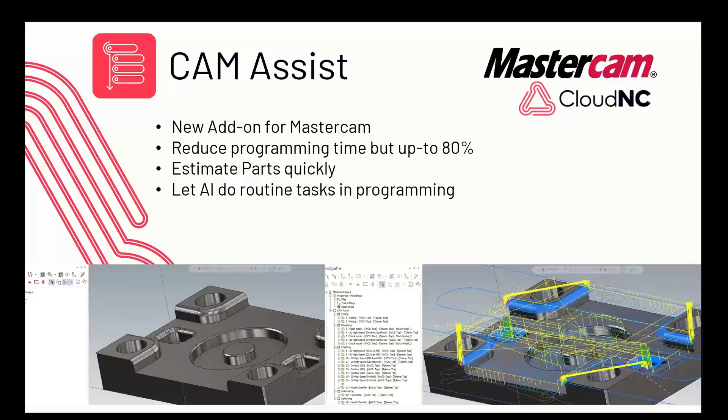So Ryan, on that, 4 to 8 weeks is what they're out for ITAR compliance. That will be a whole separate server that they're using that will be registered and be good for ITAR compatibility. So 4 to 8 weeks. And I do have a list of people to be contacting once that comes available.

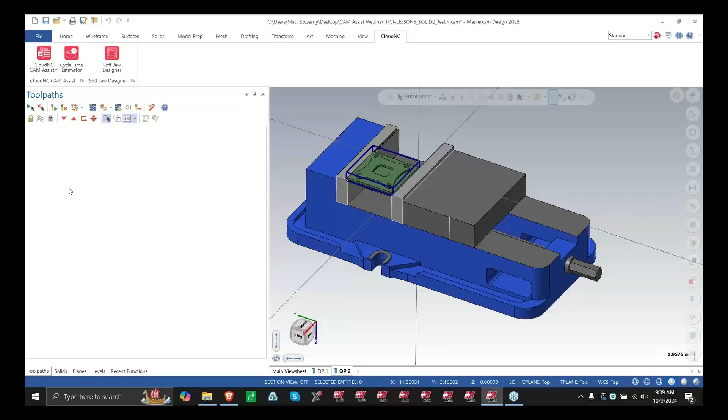Next, I need different machine group setups. So if I'm doing one operation, I need to define that. If I'm doing 2, which I'm doing here, I'm going to need 2 machine groups. So I'm going to quickly do that here. I'm just going to go to my default, and I'm going to need 2 of these. So right off the bat, I'll just call this one op1, and I'll call this one op2.

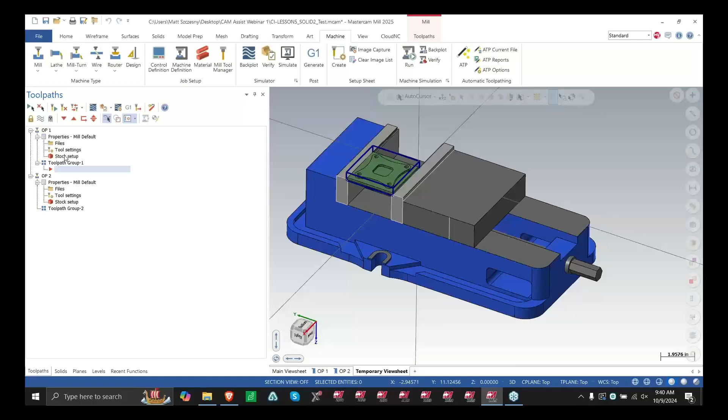So inside these machine group setups, you have to only define 2 things, and that is your stock and your master model. So I'm just going to go right to that page here, and I'm going to turn off my vise here just so it's not in my way when I define the stock, because I've created that nice bounding box for me. So I'm just going to go through this here and define that as my stock.

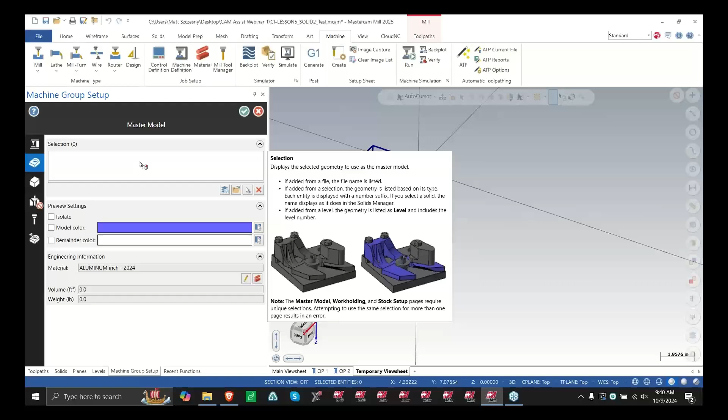Okay. Now this is the master model. This is another thing Cam Assist needs to recognize. All this section is determining what is your finished part and what's not. So I didn't want to define that whole fixture assembly, that Kurt vise in there. So all I'm going to do is say, hey, this is my part right here, and I'll end the selection on that. So that's my first setup right there.

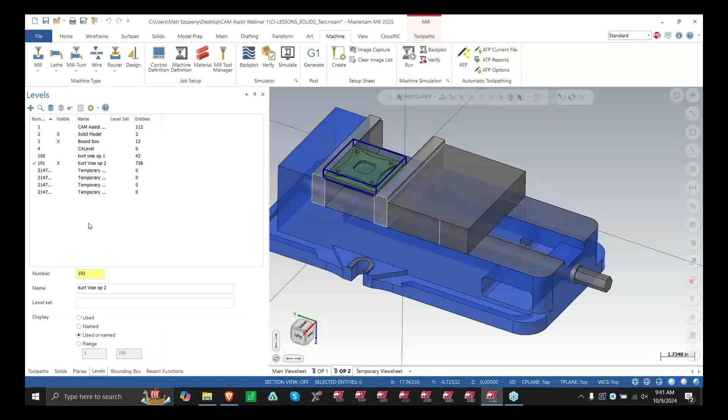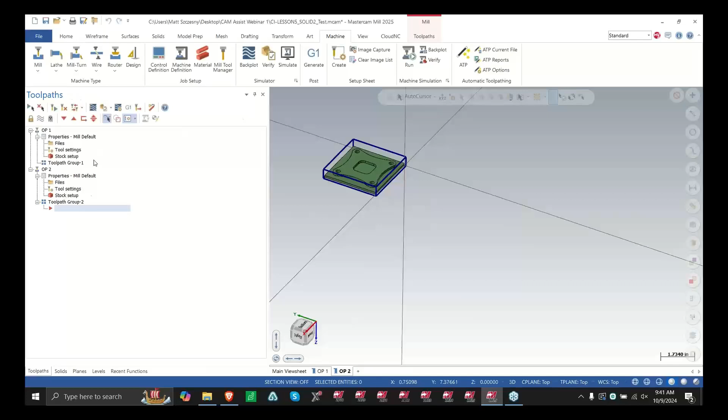Now the second one down here, you need to define it the exact same way. So I'm going to go to my op2. I'm going to turn off my vise here. So again, they have to be the same values in operation 1 as they are in operation 2. Again, I'm going to set up my master model. And then I can just green check out, and that is quite literally all you have to do for the machine group. Just set up your stock, set up your master model. So that's step 2 there.

Now the next thing, we want to determine our tools. Now I'm going to show you a bunch of different ways that you can let Cam Assist use its own tools, or you can, in this model, I'm actually going to define what tools I want to use. So I'm going to open up a library here on my desktop that I'm using for this. So I'm taking these tools here, and I just came up with some random ones that I thought would be a good job for this part.

Now those of you that have seen this part before in the class we teach here at Elgin know that this part probably takes us more than half the class just because there's a lot of chaining involved, there's a lot of different tools, there's a lot of different things to cover, we're designing it. So I'm just picking a few tools here that I think would be good for this job.

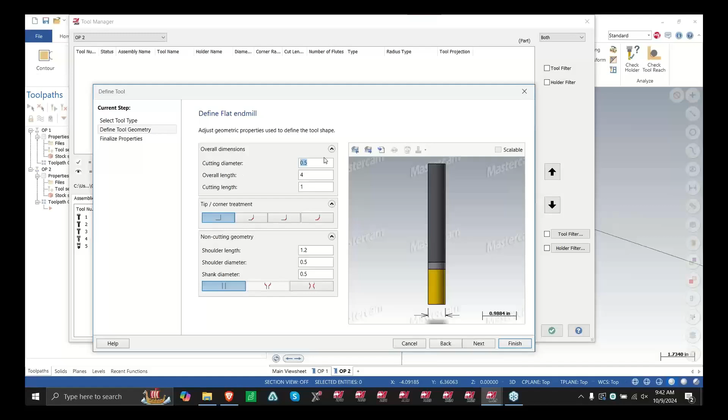Now, another thing I need to mention here is they have to be defined as assemblies. They cannot be defined as tools. Cam Assist does not pick that up. So if you've never worked with assemblies, it's as simple as I can come up here and create a tool. I can say like a 1/4 inch flat. And I could just bring it right down into that assembly, and now it's saved in that section.

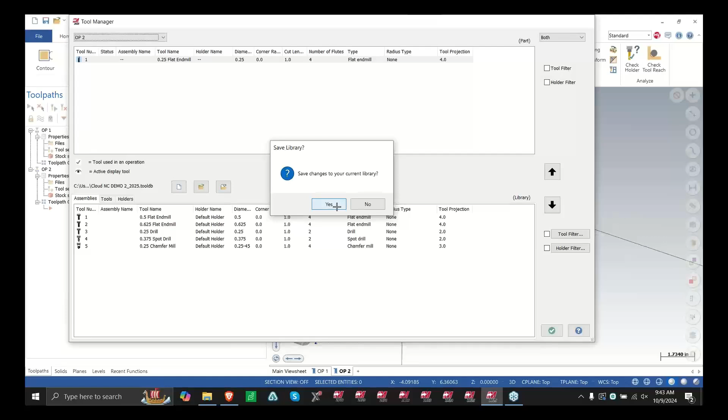I'm going to delete this just because I don't want to use that for now, but I just wanted to show you it's as simple as that. Creating a tool, bringing it down, it's now in your assemblies. So I'm going to green check out of here and save these changes. Okay, so step 1, we line up our part. Step 2, we define our machine group setups with our master models. Then we took the time to define our tool assemblies, all the tools we wanted involved in that.

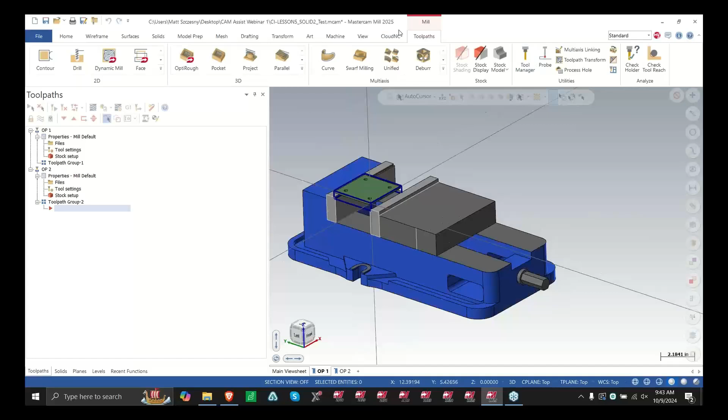Now it's time for us to jump right into CAM Assist here. So right here, I'm just going to jump into the CloudNC CAM Assist. Alright, so first thing we'll see here is the tool library. Now this is going to the, actually the correct library I want. I'm just going to make sure I have that exact one. Okay, so tool library is set.

We have different machining modes. I have 3-axis and 3+2. CAM Assist supports most CNC milling machines. It currently does not support any lathe, but that's currently in the works. So kind of stay tuned for that down the road. And I'll show you some 3+2 examples a little later in this webinar.

Next, you have the setup orientation. So I have operation 1, which I was using my top plane for. And then I have some select avoidance geometries. So I can go in and choose that. And I'm just going to pick these jaws right here. Say, hey, just don't come close to that. And if you hover over this section, it says press escape when you're finished. So now I have these 2 avoidances selected.

Op 2 here, default set to bottom, but I'm going to use the user-defined plane I created, which was just called op 2. And just to reference, that is this operation 2 right here.

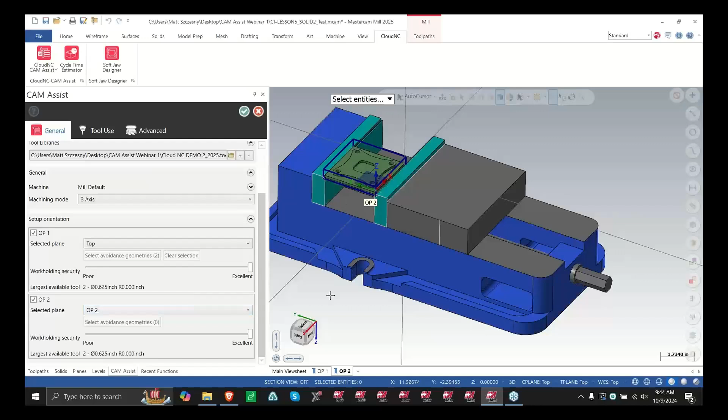Now I can jump over to my other view sheet and just say, hey, even though it's the same spot, I'm just going to click these jaws right here, and I'll hit escape. So I've defined my operation 1, I've defined my operation 2, selected any avoidances I may want. Now I can jump over to the next tab, tool use. So again, it's taking that exact library.

It found 5 assemblies, and this is that area where I said you can't just use tools, you have to use assemblies. I'll come back to why it says no material there a little bit later. But these are the stock materials that you can define. So there's aluminum, high carbon, low carbon steel, titanium. And now with the newest update, I think it came out October 2nd or so, you can now define alloys. So I have these different ones if I chose different stock materials. So that's a really nice new feature added.

So I'm just going to say, let's use aluminum. And I'm also going to come back to this section, but for now we're just going to say use CAM Assist feeds and speeds, but if I define them, you can use them as well. So this section down here, this is where I could filter out or decide what I want to use or what I don't want to use.

So right now, for tool 1, maybe I don't want it to do any helical boring. I don't want it to do any roughing, so I could just uncheck those and it's not going to do that toolpath or operation for it. Whereas maybe this number 2 here, I want that to just do roughing. I don't want it to do any of these wall finishing, flat finishing, or helical boring. And then I'll keep the rest of these on with drilling, spot drilling, and chamfer milling. The next tab over, this is where you can define what types of toolpaths you want to do.

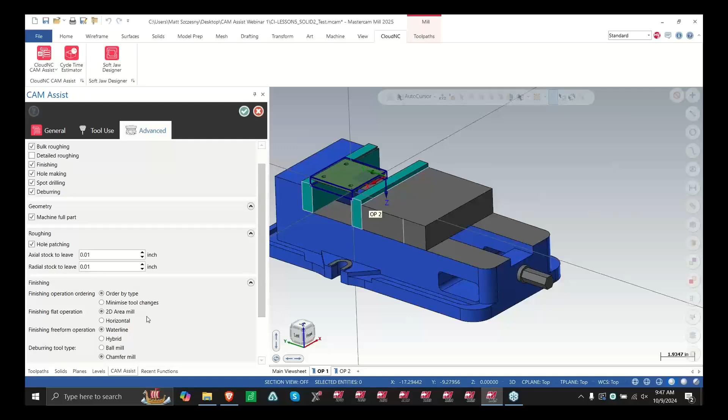The geometry section, I do want it to machine the full part, but if I didn't, I can just uncheck this box and select the faces that I want to machine. I'm going to leave some stock for axial and radial as is, and then you have what type of finishing toolpath is supported here. Now you're not going to see every finishing toolpath that you might want, like equal scallop. It's not quite in CAM Assist yet, but it is in the works. So these are the finishing ones that we're left with.

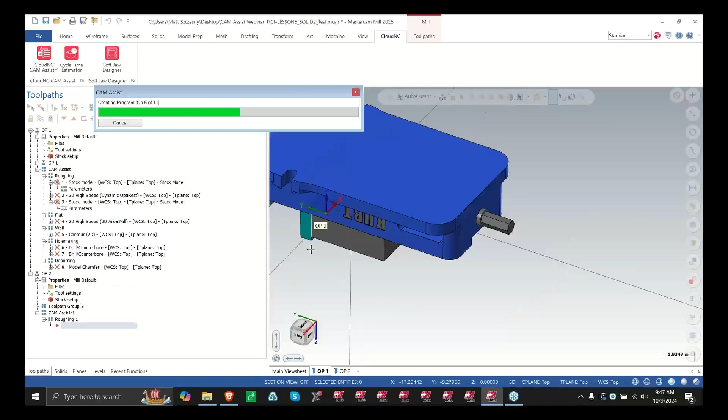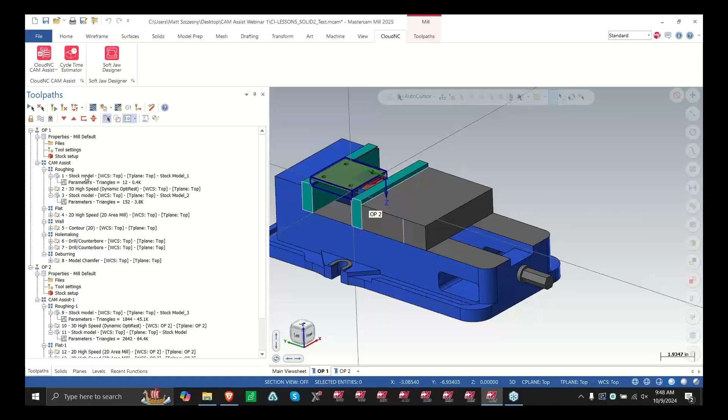Alright, so again, this is a lot faster regen time because it's a simpler part. The bigger models, the more 3D work involved, it's going to take a long time. And I don't want you guys to have to sit here for 30 minutes just watching this thing regenerate. So in the first operation here, we start off with the stock model that it creates. And then it goes right into its toolpaths. Starts avoiding those sections. Another stock model, followed by some other toolpaths to do the finishing, some drilling cycles, and some chamfering.

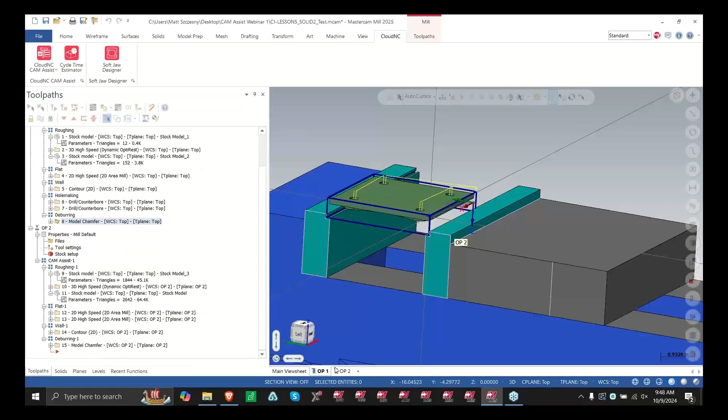Now operation 2 starts off with the stock model from operation 1, and then it continues on roughing using stock models, as we see there.

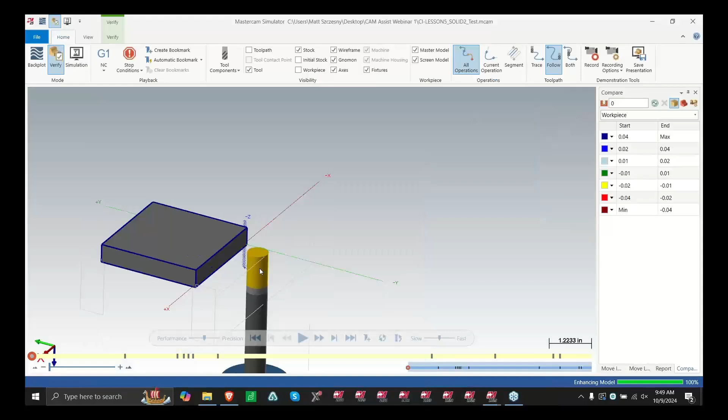So I'm going to select all of these. They go right into verify, and we can take a look at what it's machined. Slow this down a bit here. There's the bottom section, and then it's roughing out to the top. So we get those nice chamfers. It's finishing all those operations. So it did a lot more than half our part, absolutely.

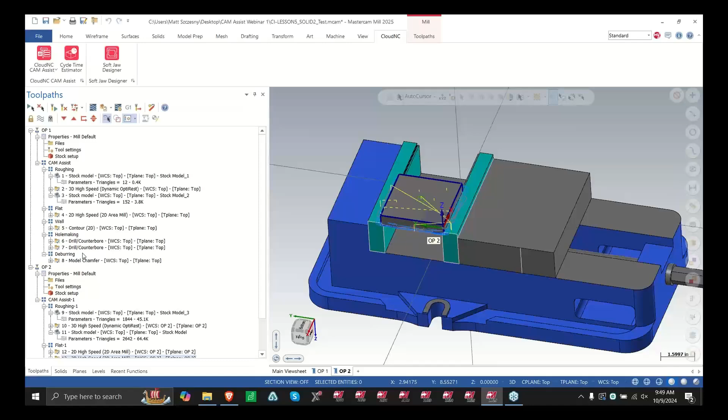If I come back into Mastercam here, there's a few things to note. Now, right off the bat, you saw it's taking all these toolpaths, programming the part for us. Now, if you are an experienced user and you know what's inside these parameters, you can, sure enough, go right into the parameters, and I can update any one of those pages with the information that's given. So it shows me what the speeds and feeds are used in Cam Assist, shows me all the different geometry selected, different cut parameters, linking. So I can go through this if I was familiar with that.

But let's say you were a brand new user, you had no experience using these toolpaths. How do I go about adjusting these without having to go through a bunch of training manuals and courses and learning all the ways of Mastercam? Well, any one of these toolpaths, like let's say operation 2 here, let's say for some reason I wanted to adjust this step over here for this OptiRest toolpath. Well, I can right-click on that tool, and we have the Cutting Parameters Explorer. This is basically to edit any Cam Assist toolpaths. So I can go right directly into there.

And we're going to get this nice interactive page that we can give all this information for. So it's telling me what operation I'm in. So it's the OptiRest toolpath there, determining the material. I'm using the default machine. Now, another important thing to note, you are going to have to take the time to set up your defined spindle RPM, your torque, get your machine specific in Cam Assist before running this. Shows the tool and the roughing that I'm using.

So this is a kind of nice interactive bar here. If I bring this over so I want to increase the tool life, these values down here will get adjusted. Likewise, if I bring it over to increase productivity, you can see these values are all going to shift. So you have depth of cut, width, spindle speed, feed rate, and if I go down a little, these are more specific to the machine itself. And again, these are all important information that Cam Assist is going to need right off the bat.

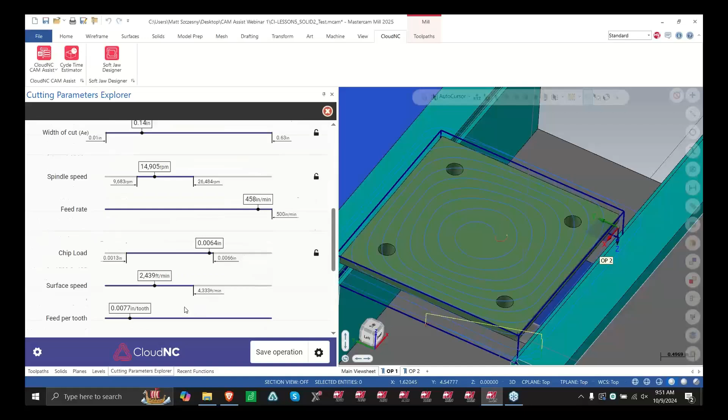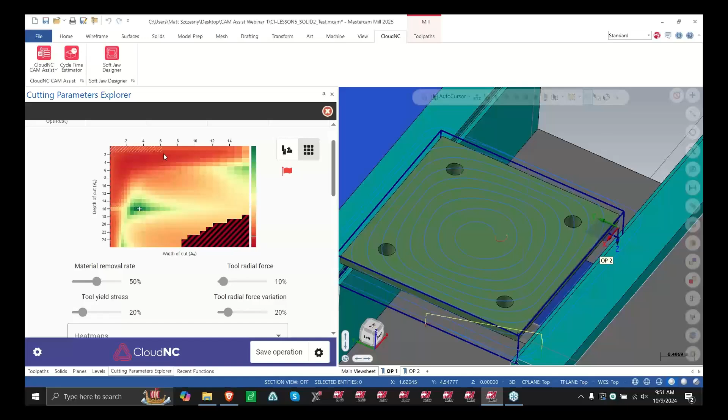So some other things with this that are nice is you get this option of viewing the tool as a step over or a step down amount, or you have this kind of heat map here. And now the green areas are the more ideal ranges of this section, whereas the red, those are the sections of my tool I don't really want to be in. So I personally like this view of my display, which makes it a little easier to determine. And this is where you can adjust these ranges.

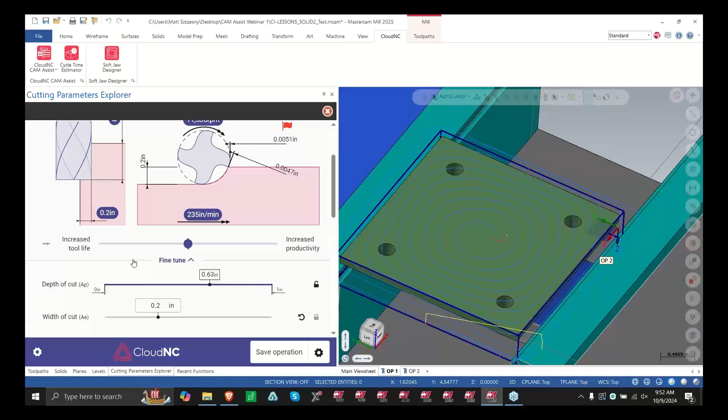So maybe like width of cut, you can take these little taskbar arrows and you can send them over, and you can see now it's basically fully engaged with that width of cut. Not ideal, that's not something I'd want. So I can tone it back down here. Or, just for dramatic effect, I can type in some numbers here. So maybe I say 0.2, hit enter, it's going to adjust those values for me. So I can save these operations, and then once I click on the force regenerate, it has now expanded that step over a bit. And so those are just a few ways that you can adjust Cam Assist toolpaths.

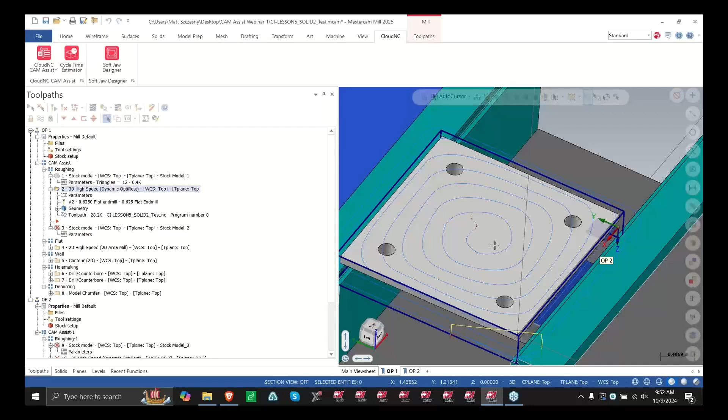Are there any questions so far, Matt? No, sir. All right.

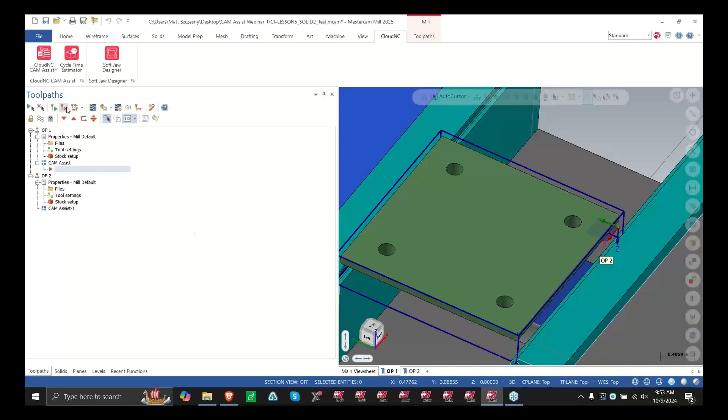So let me take a step back here because I want to show you a few things. I'm going to delete these operations just because we already have our stock set up. I don't want to have to go through that again here, so I'll just delete these. So I still have my machine group set up. All is good. Now, when we went to define our tool assemblies, as you see here, I didn't really give it any information. I just pulled this from the default Mastercam mill library.

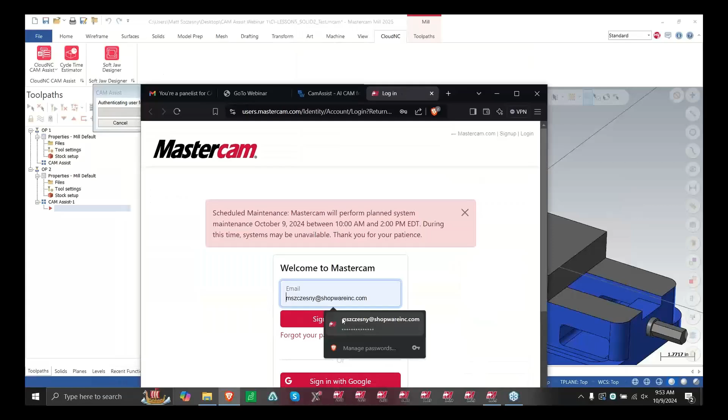But if I go into Cam Assist, see here it's asking me to sign in here. Just give me 1 second. So yes, allow.

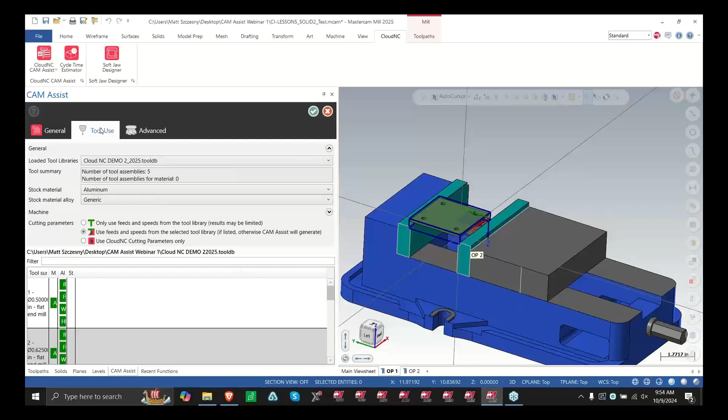Okay, so I'm going to set this up as my op2. All these are still the same as before. But when I go into tool use, you're going to see that when I hover over this, there's this term no matching presets. So this means that no matter what I do in defining these spindle speeds and feeds, it's not going to pull them from the library I define.

But if I use something here like Cam Assist's library, and let me go ahead and quickly find that here. So I have this Cam Assist inch. There's also the Cam Assist metric, as you can see there. So I'm going to open that up, and we're going to see a little difference with this. When I go to my tool use page, I get all these little blue boxes.

Now those are presets that are defined, and these were where Cam Assist took the time to test all these values out. Tool speeds, surface feet per minute, feed per tooth, all these values are saved with these presets. And there's quite a wide list of these tools that you can use. Now, you can run these tools just as is with Cam Assist, and it does a really nice job, which I'll show you in another example.

But let's say, for instance, I want the tools that I defined in my assembly, and I want to define my own speeds and feeds for that. Well, if I go back to my database here, again, those presets are not here. So how do we define our presets? Well, this is where we're going to go and use the outside tool manager.

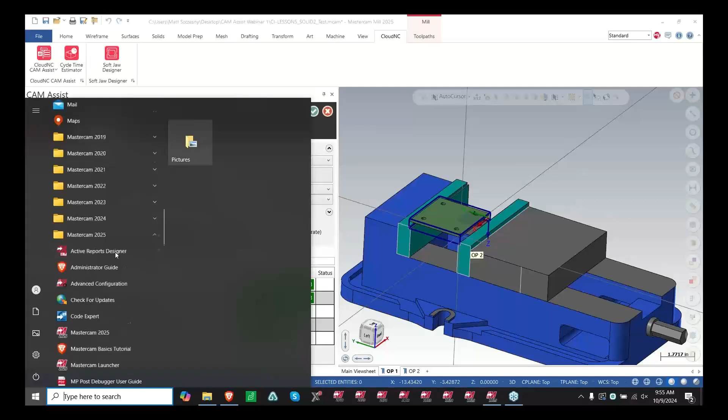So if I go to my start menu and I scroll down here to the version of Mastercam I'm using, 2025, and I'll just go ahead and click on my tool manager. Well, that's loading very fast.

You mentioned processing on the cloud. It's creating the toolpaths. So Cam Assist is creating the toolpaths in the cloud. So once they come back onto your computer, once they show up in your toolpath manager, then everything is on your local computer. So the regen, everything, that is all done on your computer. So once the toolpaths are on your computer, you can do any editing there, and then it's done communicating with the cloud.

Yeah, so basically it's just sending the toolpath data and all the settings of the toolpath and the surfaces selected. That's what it's calculating up in the cloud. And then the actual regeneration of the toolpath inside of Mastercam is done on your local computer. I hope that makes sense.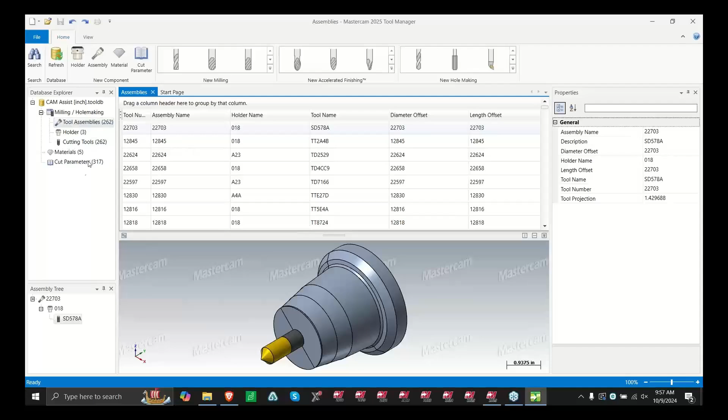So when we open this outside tool manager, I'm going to open up the two different libraries. First, I'm going to open up the Cam Assist so we can see what's already set in there. Alright, so when I open that, I can see there's a bunch of different tools listed as tool assemblies here. And they also come with material and cut parameters here. So all these cut parameters were calculated and tested out by Cam Assist, and you can see it's a lot of manual work involved setting these cut parameters.

But let's just say we wanted to do it anyways. I'm going to still show you how to do that. I'm going to reopen the tool assembly that I'm trying to set presets for. And we can see the assemblies, I have 6 of them, but there's no material and there's no cut parameters. So it's never going to pull any information because those two are not set.

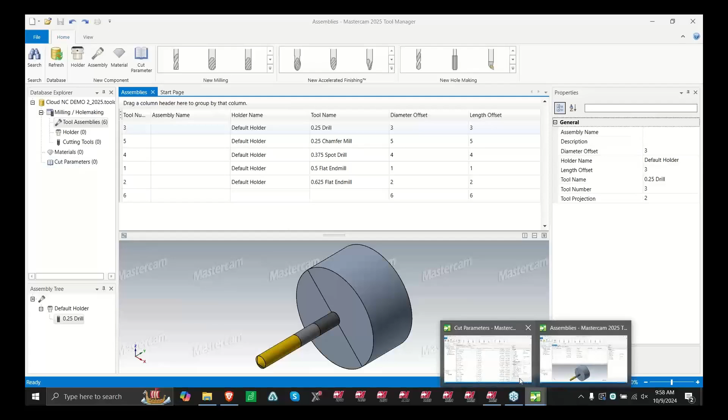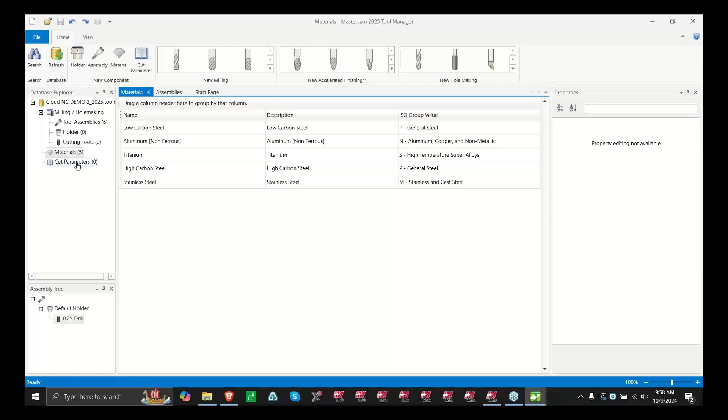So what I can do is I can take CAM Assist's library here, and I'm just going to copy this material. And I'm going to go into my library, and I'm just going to paste it. And now we can set a cut parameter. So I'll go into that section. There's currently nothing. So let's add a cut parameter.

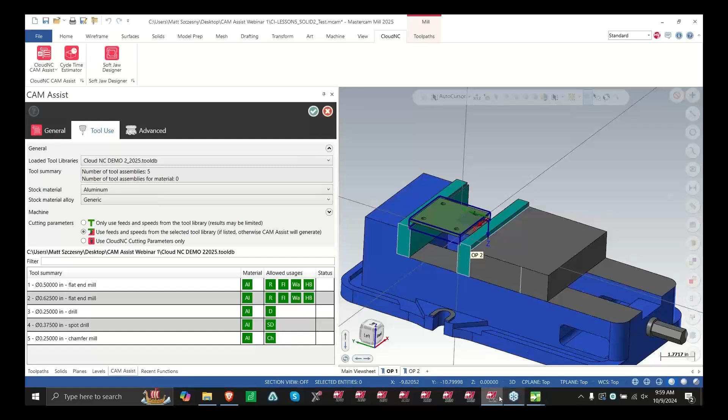So when defining the cut parameters, again, there's no presets in this section currently. Let's say I wanted to make a preset for tool 1, this 1/2 inch flat end mill. And maybe I want to just use this 1/2 inch flat for, say, just roughing.

I could come over here to the name, and how I'm going to define this is I'm going to say the tool number, which is 1, and I want to say that tool is going to be used for just roughing.

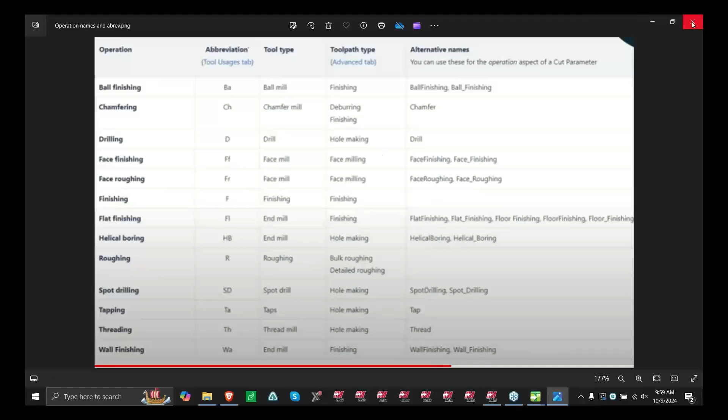Now, when determining the names and how these work, I have a nice little abbreviations sheet. And this is actually on CAM Assist's website. It's a little blurry, but these are the different operations you can determine, and these are the abbreviations. So roughing, you just stick with an R, and these are the operations that it will only do. Whereas finishing, you can see the kind of abbreviations to make your library as you please. So I'm going to keep it like that.

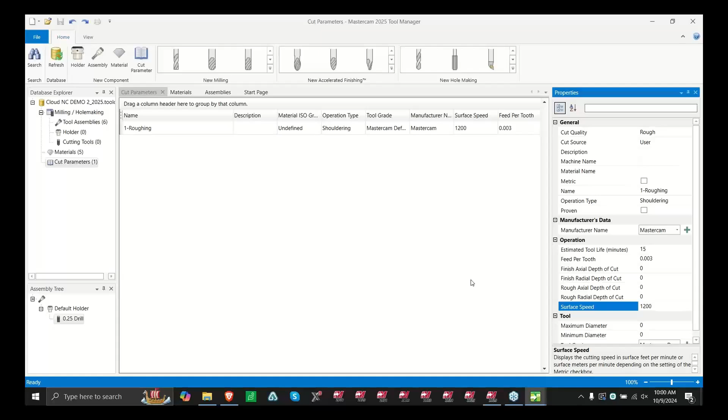And Cam Assist needs 2 things when defining cut parameters, which is the feed per tooth. So let's give it a hefty 3 thou there, and surface feet per minute is another thing it needs. So I'm just going to say 1200 for now. Now you do want to end up giving it more of these informations like finish axial, finish radial, but for now I just want to show you where these values will populate this information.

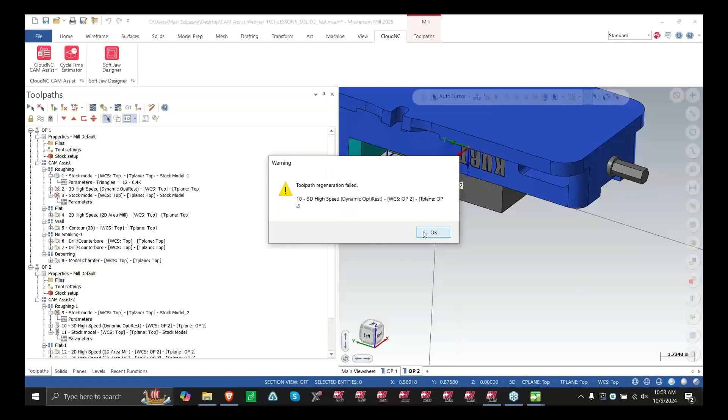There we go. So, if I go into the toolpath once this finishes here, it's okay that it failed. I'll explain why it's doing that. So I just want to look at the roughing operation here. Right off the bat, it says it's going to fail, and that's because I haven't defined any step over or any step down in my tool manager, as you can see here. So I'm just going to quickly give it something that I know is going to work here. Let's do 12% for both of those, just to calculate that. And now it fixes that operation.

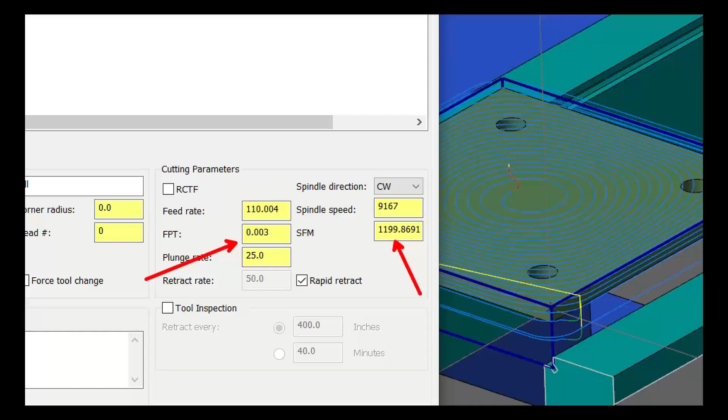Okay, great. But I'm looking for, did it actually hold my feed per tooth and did it actually do my surface feet per minute. So if I go back to my tool page, right here I can see it did define those exactly. It's 1199, close to 1200, but it is taking in that feed per tooth. So this is how you can go about actually setting your own speeds and feeds. But like you can see here, it's a bit of manual work. So this is going to segue into where we can actually take advantage of CAM Assist's tool library.

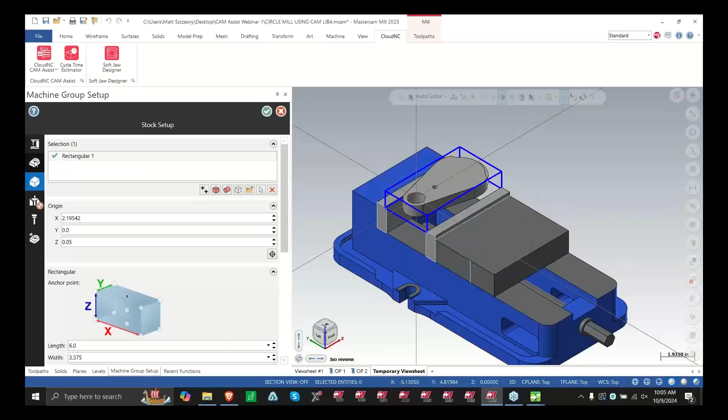So I'm going to open up another part here. This might be another part that you're familiar with in class, where it takes us quite a bit of time with the amount of different features on this part. So I've taken the time already to set up some stock, set up my master model just as before. Nothing's different. Both are the same for the machine group setup.

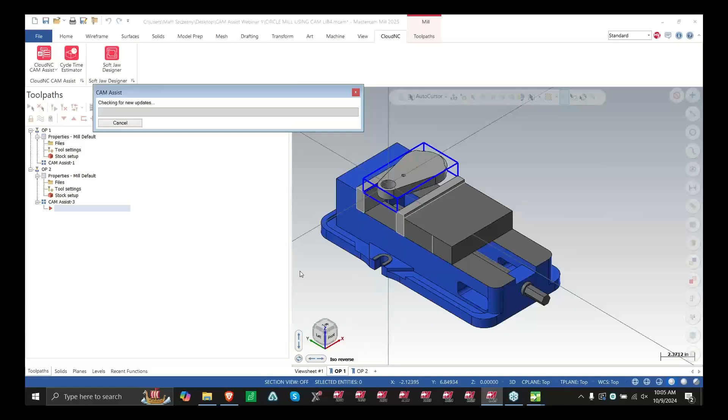Now instead of using my own tool library, I'm going to use Cam Assist tool library. So I'm going to go into my Cam Assist here. And I'm going to set this back to the Cam inch. Let me go ahead and find that really quick. Cam Assist inch, I'm going to load those tools. Those already have the presets made for me. I'm just going to set this to operation 2, so it does both top and bottom of the part. I can select my avoidances if I'd like.

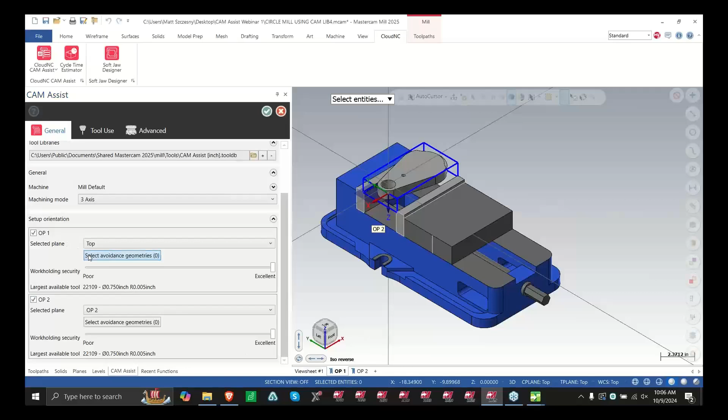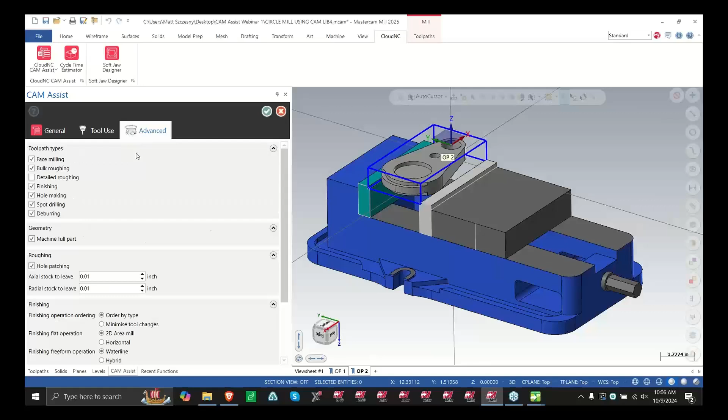Alright, so that is set right there. I'll keep it 3-axis. Tools used, it's going to find all that information from that library with all these presets. So without me going through this list and turning off all these individually, I'm just going to let it run and see what it does here. So nothing really different here. I'm going to keep the stock values. I'm just going to run it with the green check.

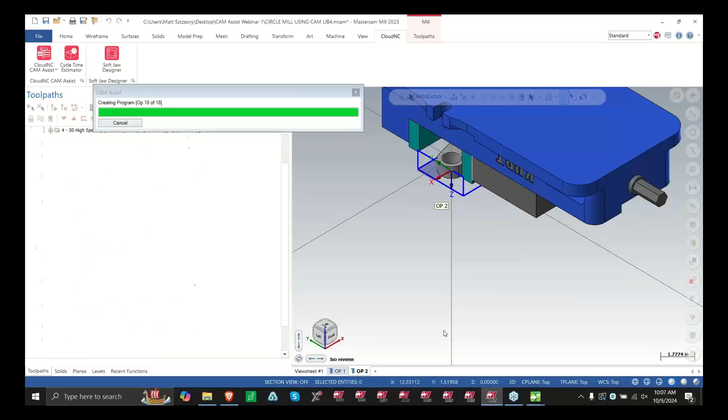Alright, so using Cam Assist library, look at that. 21 of 21 surfaces machined. Great. I can say OK, and then we'll do our actual true testing on it, make sure it's actually telling us the truth here. We'll let it just do its last minute regenerations. Okay.

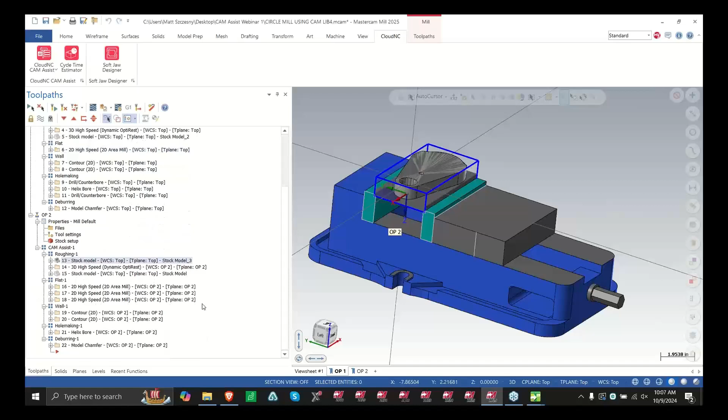So let's see what we got here. We got some facing, followed by our stock model, some roughing, followed by another stock model, some different operations. When I get to operation 2, more stock models, more roughing, and then we get some more finishing operations. So let's see what this looks like when I go to verify it.

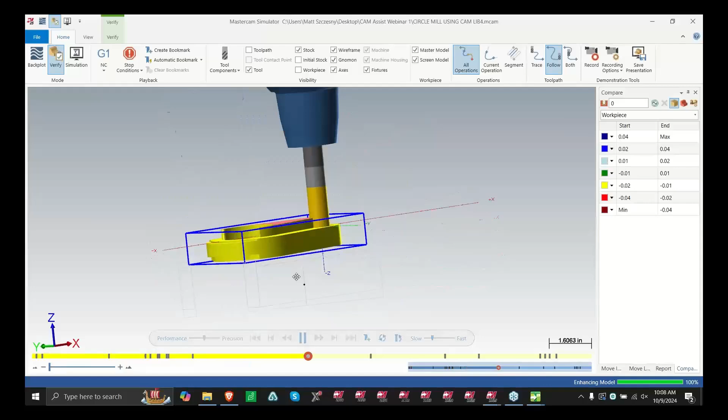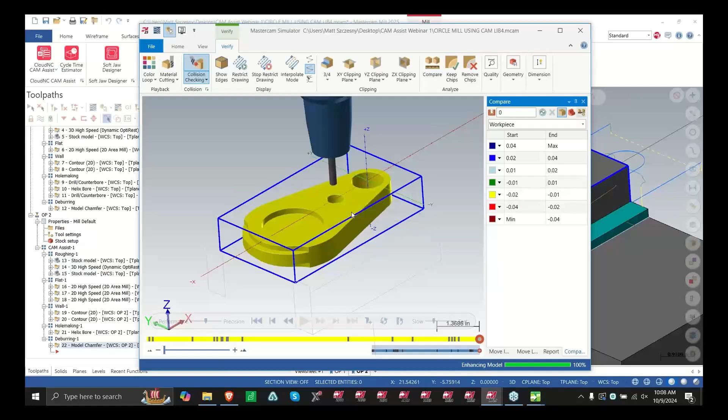So start off with operation 1 and then operation 2. Now if we want to check how much this is machined to by a specific tolerance, you may know of the compare feature. So I can say I'm going to check what's machined to a 10th tolerance. When I hit the refresh here, my whole model is green. So it's machined everything up to that 10th.

I could go in more if I want to, but it found exactly 21 of 21 surfaces, and you can see how little interaction I have to give it. Really just doing the hard work by setting up my planes, making sure the parts are orientated correctly. It's kind of taking care of all that work for us. So this is also a good way, as you saw, we just let Cam Assist use its library. We can build our own tool libraries in our shop based off of Cam Assist.

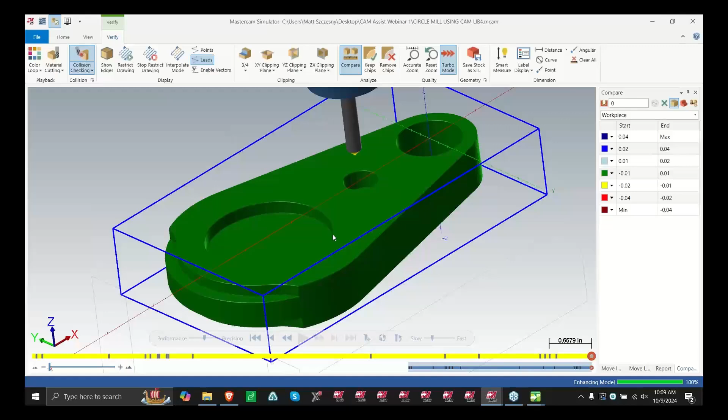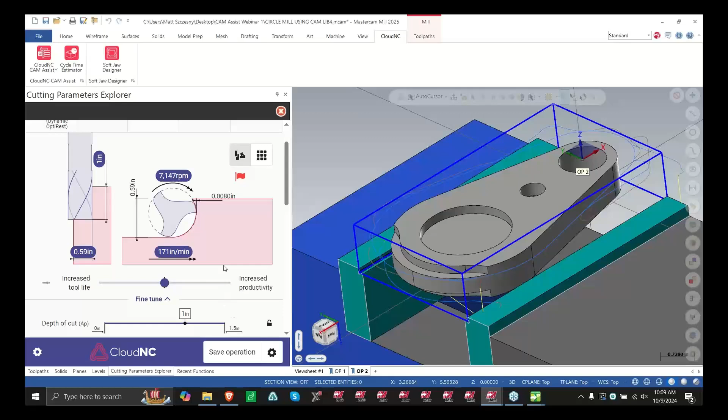I can look at the list of my tool paths, and I can determine from this list, okay, these are probably the best options for this part. I'm going to go grab those tools. I'm going to make that in my own tool library. Another thing with editing these tool paths, going right to that parameter explorer, if I save that information in this operation, it's going to save that to my tool path, to my tool library itself, so I don't have to go and adjust those parameters each time I'm switching tools. So that's another thing to look at.

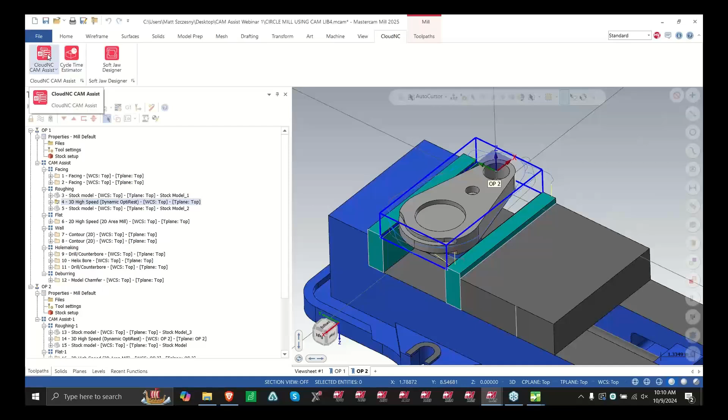So again, it's an assist tool. It's more so to take care of those kind of menial jobs that you can see. This does a great job of just producing that tool path. There's a few other things I still want to talk about though, where maybe we want to do some 3+2 machining. Now, once I have Cam Assist on my computer, there are a few demo parts that you can always take a look at. So I'm just going to use this demo 4.

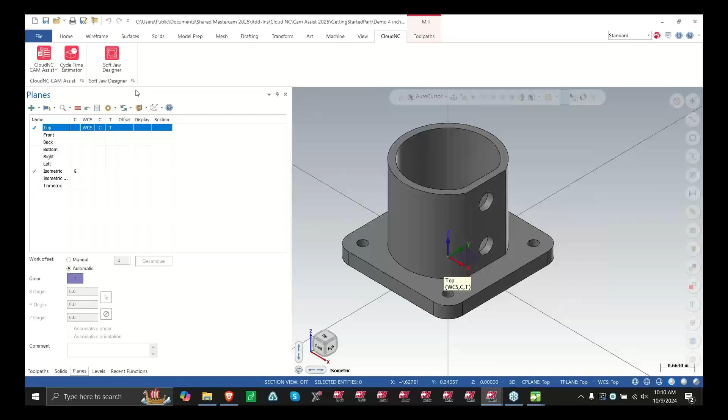And let's say I wanted to only do this 3+2. I didn't want it to do any 3-axis on top. Well, those of us that know how to do 3+2, we have to create some planes and do all that work up front. Cam Assist takes care of that for you. Now, just to show you that, we have all these top, front, back, bottom, right planes. I'm going to shift my part to show you how it's actually going to make that. So if I go to rotate this, it doesn't necessarily have to be perfect to a 90 degree. Let's say move.

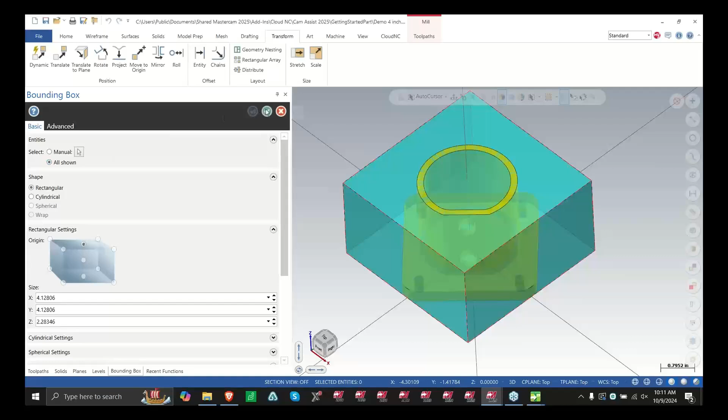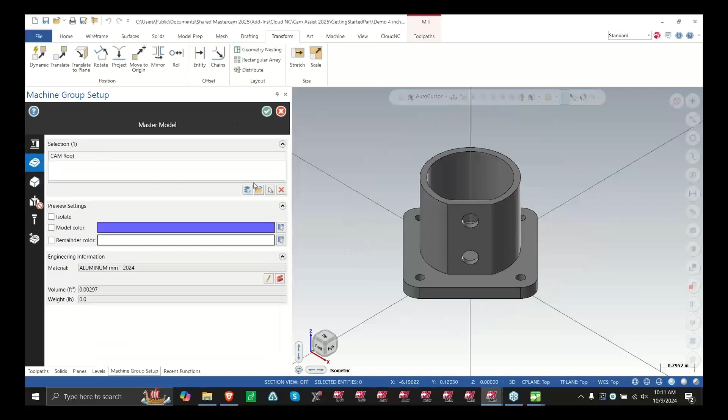So my machine groups are here, but I need to set up new stock because I tilted it, as you can see there. So I'm just going to add from the bounding box and say all shown. And I'll say that's my stock. Master model's already selected. I'll just select it again here just to make sure. Again, I want to do the same thing for operation 2. So machine group 1, machine group 2, all set up the same way. Not even going to worry about how it's orientated. I'll just use Cam Assist library.

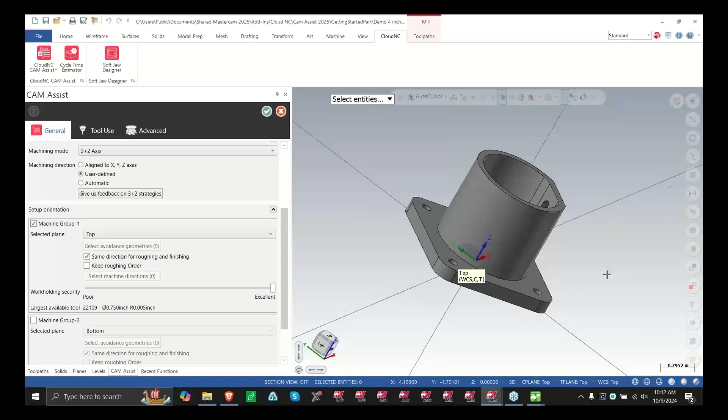And I'll switch this machining mode to 3+2. For machining direction, if you used align XYZ, you'd have to make sure the part is aligned. But I'm going to set this to user defined so that I can utilize this orientation change. I'm going to turn off machine group 2 because I don't want to use that. And I'll just keep it set to top. And here's where I can select my machine directions. I'll just pick all 4 flats here. So again, anytime I select it, you can hover over that little status bar up top and just hit escape. And it's going to pick off all those 4 directions.

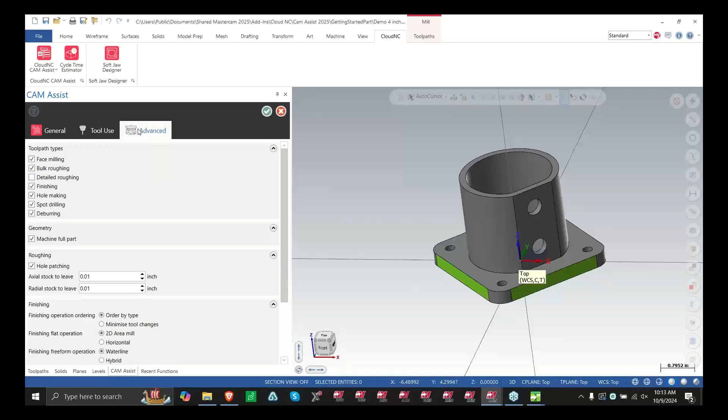I'm going to use CAM Assist's library just as is. And I'll just hit the green check. Alright, so 11 of 28, and that's just because I didn't pick the top section, so it's not going to machine from the top. It's only going to do it as 3+2. So I start off with, again, my stock model. I'm just going to wait for a little bit of the rest of these to regenerate.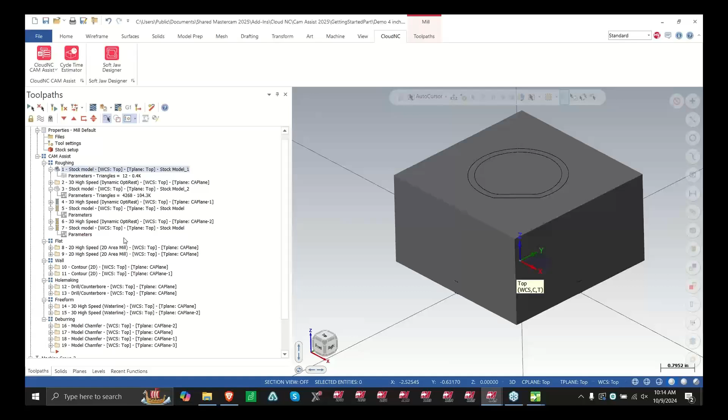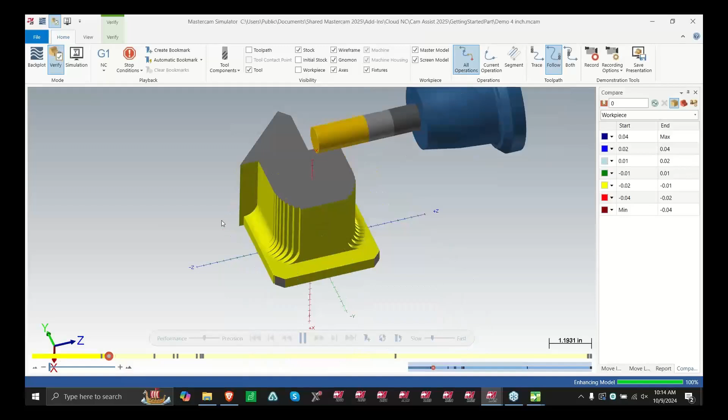Alright, so we got some roughing, some more stock model, roughing, kind of chipping away at that stock model until basically it looks like that. So again, these are probably some parameters that I'm going to want to adjust because it's taking some hefty cuts there. But without having to even create my planes, it's doing that 3+2 work for me. It's doing some other finishing on the sides there.

So just to show you, back in my planes page where we only had those default Mastercam planes, I now am going to see all the different Cam Assist planes that were created. So all that kind of menial work that I'd have to do to create those up front gets taken care of with Cam Assist.

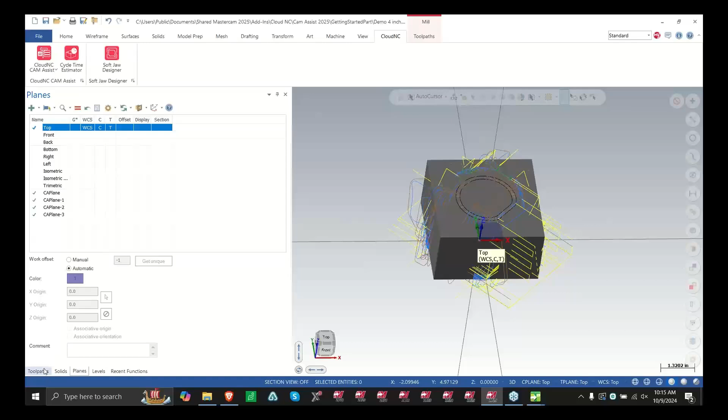All right, so for the cycle time estimator from CloudNC, what we need to do is make sure the parts that we want to be estimating, we're going to be putting them into a folder. So I got a couple folders here that are pre-set up. I got one with 1 part, I got one with 3. So we're going to look at this 3-part estimator folder here. So if I open that, I got part 1 here, part 2, and part 3.

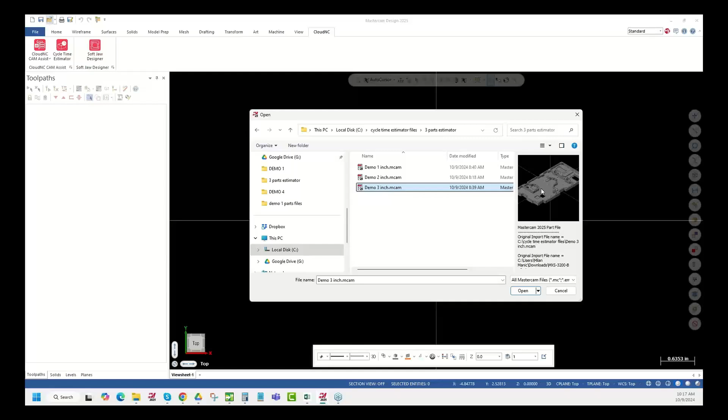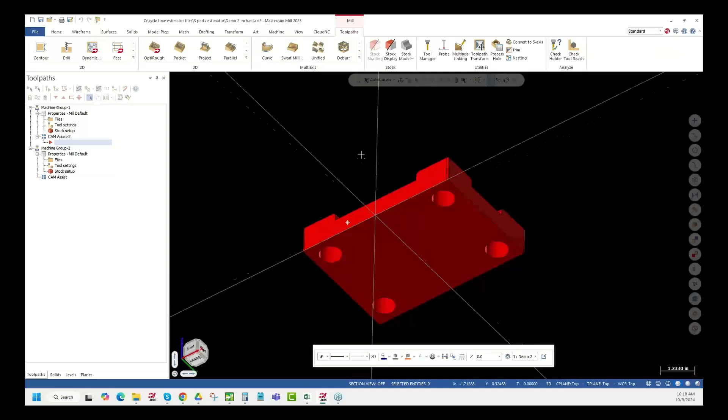So the same setup that Matt talked about in Mastercam, we need to do with each one of these files that we put into this folder. We are going to need to define our master model, and we're going to need to define stock. So I just put a bounding box around this and I picked the master model. These are 3-axis parts, so I got 2 machine groups.

So the same setup that Matt went through: machine group 1, machine group 2, and we want to set these up the exact same way. So master model, stock, exact same way. So I went ahead and I've done that for these other 2 parts. So all 3 of these parts are set up the exact same way, with the stock, and we definitely need to make sure we got the stock the same, and we pick the master model.

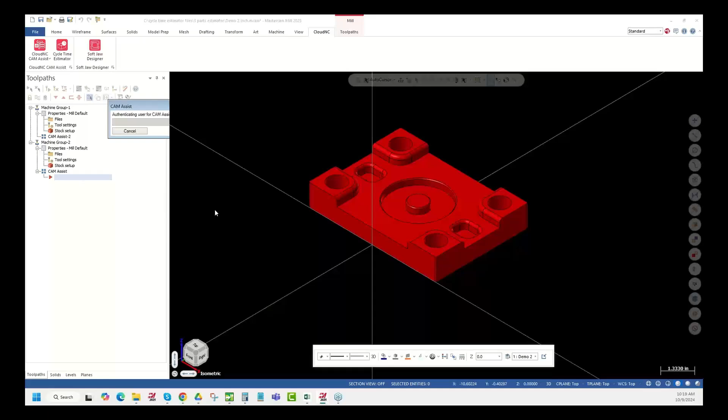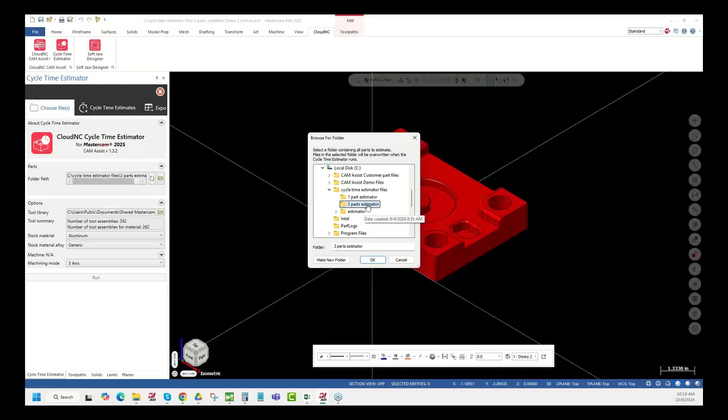So once we get those set in a designated folder, then we go into our CloudNC, we hit our cycle time estimator. And now this is going to look a little bit different than what Cam Assist did. So here we're going to look for a folder path. So what folder do we want to look at? We go to, oh, wrong one here. Cycle time estimator files. So we want to pick the folder. We're not going to go in and pick a specific part. We're going to pick this folder, and it's going to highlight. It's going to show we have 3 parts here that we're going to be looking at.

So tool library. Here again, now we're going to pick our tool library. I am going to use that same Cam Assist tool library that Matt had been using. It's going to show tool assemblies. Here again, we can pick our material. One thing when we're doing this estimating, we want to make sure that the parts that we put into this folder are all the same material, and they're going to go to the same machine group type. It doesn't necessarily have to be the same machine group, but we want the same machine group type. So for this, we're going to use aluminum, and we have the alloy that we can pick there too. We're just going to go with generic.

We go to the machine here. Now these are some setups that we can have for our specific machine. Spindle speeds. This is going to help with some of the cycle time estimates that are going to come through. Spindle speed, our max feed rate for the table. This is one that I really like playing with right here, our tool change time.

So when I was doing estimating, I'd take Mastercam, I'd put the part in, I'd put some toolpaths to it. I'm sure everybody that does estimating does that; it's a good gut check to get a good estimate of time. One thing that I would always forget about is the tool change time. There's not a way in Mastercam to add that in, as far as I know anyways. So with the estimator here, we can change this tool change time, depending on chip to chip, how long your machine takes. Let's just leave this at 30 seconds for these purposes. Okay. So once we get those set up, now if I hit run, it's going to run all 3 of these.

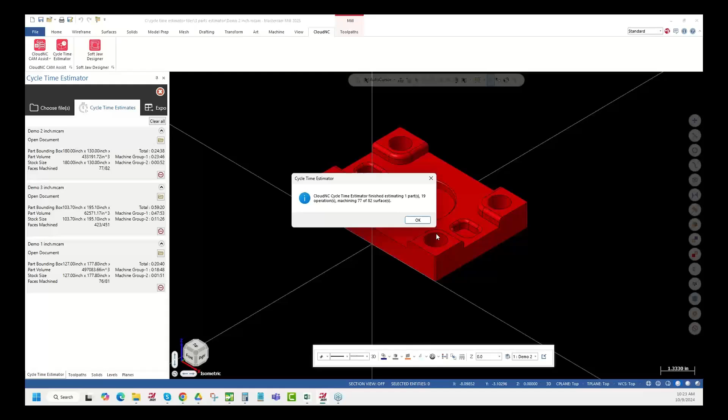Once this Cam Assist box goes away up here, then it's no longer communicating with the cloud, and everything is back on your computer. All right, here we're hitting cycle time, or the estimator, say 19 operations, 77 of 82 surfaces. This is something that'll pop up in the estimator, and it pops up in Cam Assist. Kind of gives you a little overview of what it has all looked at.

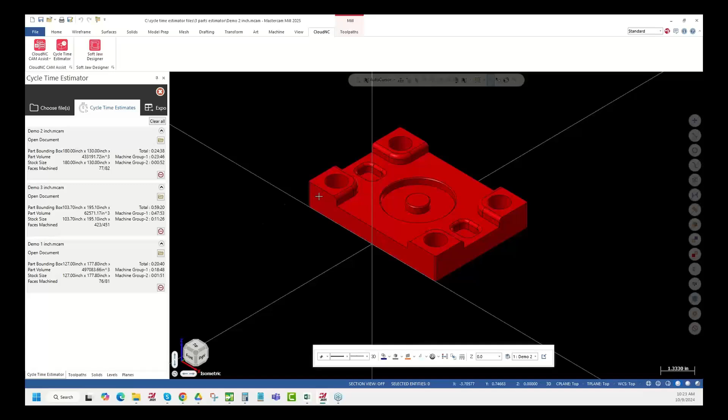So we look into here. We are on demo part 2. So this will give us a cycle time, an estimate. Total time, 24 minutes. Machine group 1, 23. Machine group 2, 52 seconds. Basically on machine group 2, since I did not have any stock on the bottom, all it's doing is just doing the chamfering.

These can be exported out into a notepad document, so you can attach these to quotes if needed. You see down here, it'll have demo 1, demo 3. It does remember from time to time, so you can keep checking back to see, okay, what did this part run, or what are the estimates on this? Until you hit clear all, then it'll wipe them out.

So if we look at our toolpaths, it did go through the same process of what Cam Assist did, and it is creating toolpaths for that. These toolpaths, you're not going to want to run this, put this into the machine. You're actually going to want to run it back through Cam Assist when you get the job and when you're preparing the job for the machine.

That's a quick overview of the estimator. Like I said, we can do up to 10 parts as long as it is the same material and kind of in the same machine group type of situation. That is really what I have for the cycle time estimator. Definitely a powerful tool.

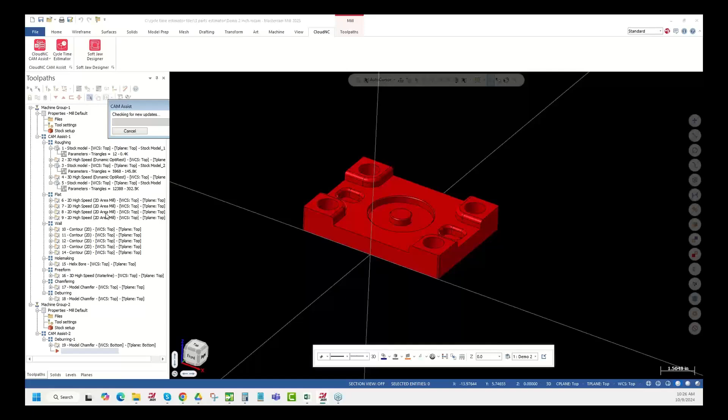One other thing that Matt did not mention, I'm just going to show you guys here real quick, is in Cam Assist, when we were picking our tool library. So we can pick a tool library. So if you are going between multiple libraries, Cam Assist will pick from multiple libraries. So you can have a few different libraries in here that it'll choose from. That's one thing that they just added on one of the last releases, and it's really nice. If you're bouncing back and forth between different libraries while you're programming, this will automatically do that for you.

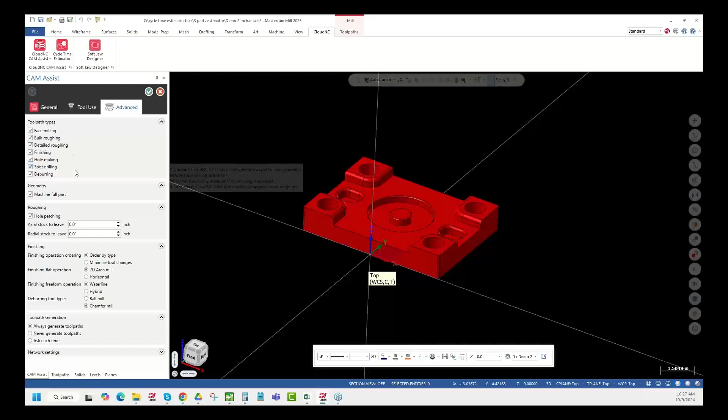So you're gonna want to rerun it back through Cam Assist again. Okay, I see. So you run like a roughing Cam Assist routine and then a finishing. For the estimating tool, it's going to go through all of those toolpath types. Sorry, I think that's what you mean there, Nick. It's going to look at all the toolpath types. It's not like in Cam Assist where we can shut off certain toolpaths. In the estimator, it's going to look at all of these and it's going to do all the toolpaths.